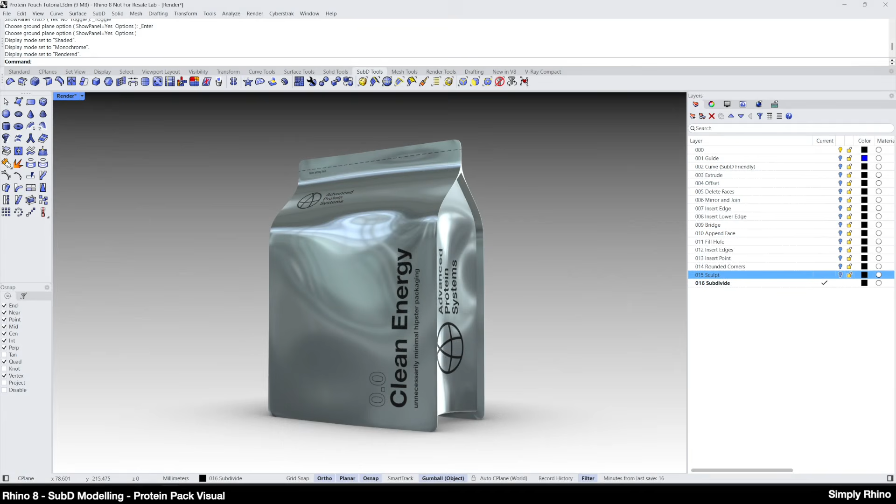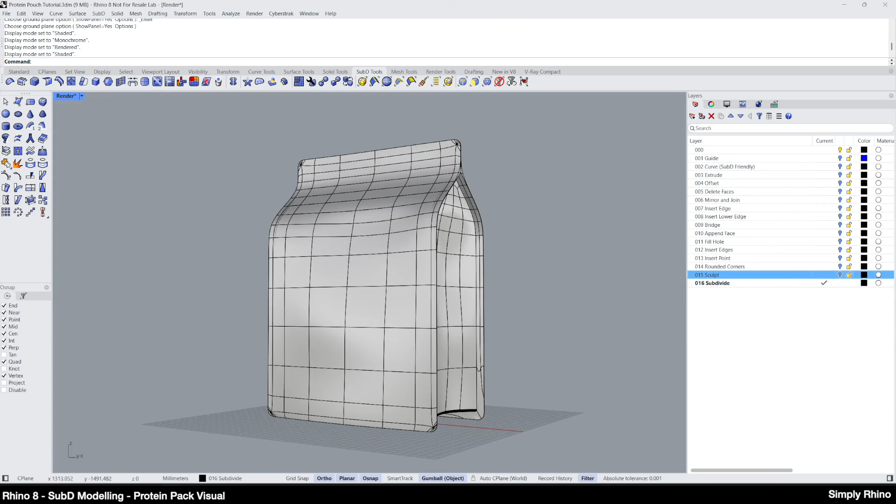I'll be using a SubD workflow which, whilst being fairly simple, requires an understanding of maintaining a simple four-sided topology. This allows for the creation of a dimensionally correct rigid version of the pack that can then be easily deformed for visualization, meaning that both production data and visuals are derived from the same model.

The starting point for the model is going to be this guide that I've created with polylines. The rectangle describes the overall width and height of the pouch, and this polyline describes the side profile structure. There are, of course, many ways to construct this model, but I'm going to start by creating the side profile

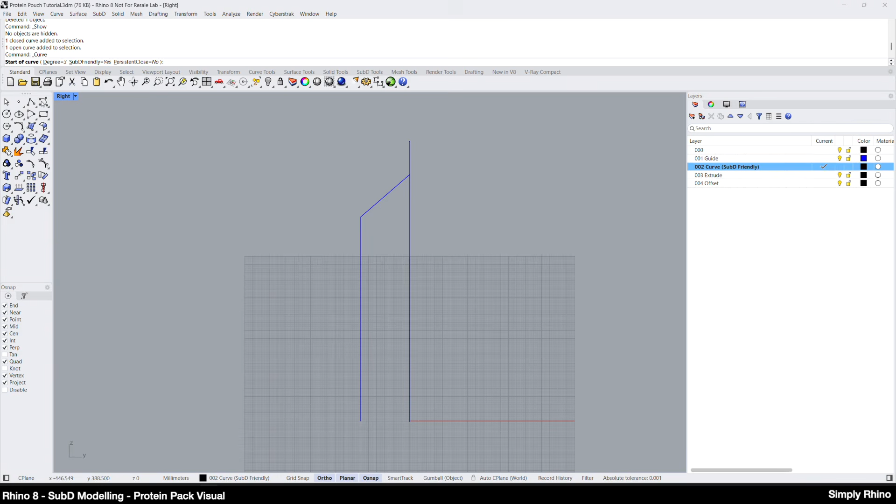shape. I've created a few layers already, so I'll make the curve layer active and create a new control point curve, making sure the SubD friendly option is set. In simple terms, using a SubD friendly curve will ensure that the precise shape of the curve will be maintained when building a SubD surface from it.

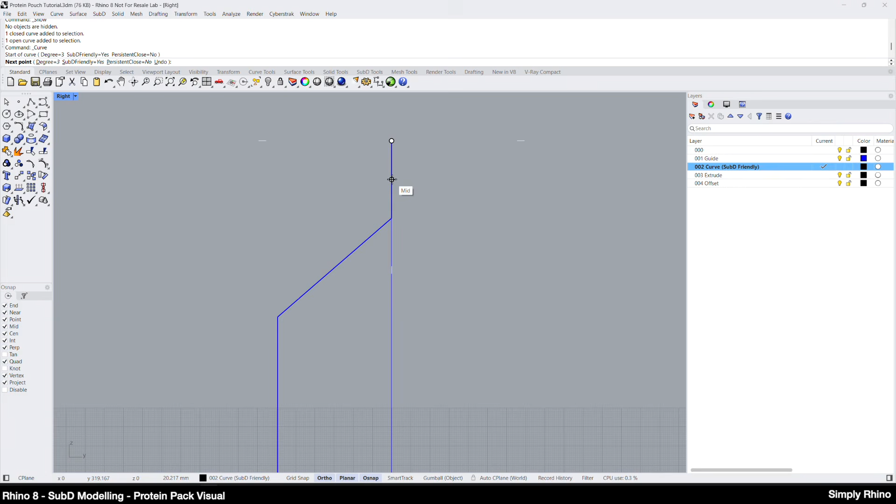I'll start the curve by snapping to the start of the polyline and then to the midpoint of this first section and then to the end. I'm going to go to the midpoint again here and then to the end, and the next point is going to be roughly equidistant from the midpoint above, and then one more point here, and finally a point at the

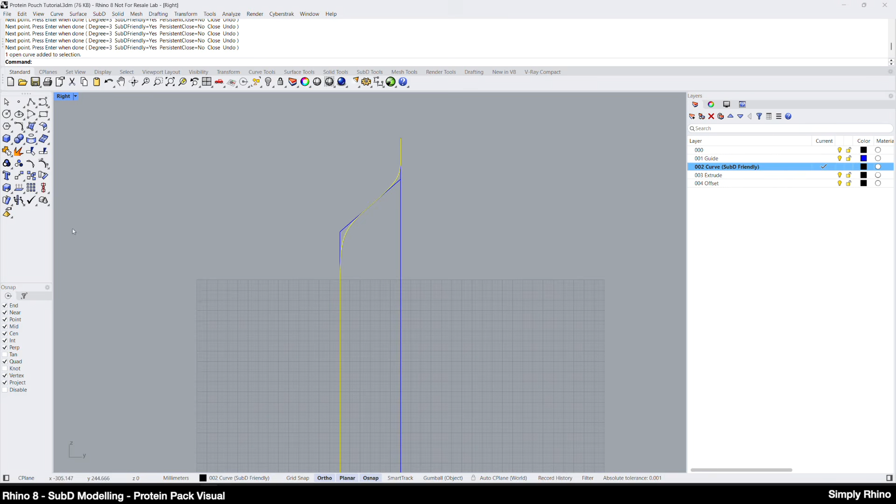end of the polyline. To tighten up this corner, I can turn on the control points and move these points closer together, and in order to equalize the topology, I might want to push this point a small amount vertically.

Open SubD friendly curves have grayed out control points at the second and penultimate positions. These points maintain a geometric limitation of zero curvature, or infinite radius if you prefer, at each end of the curve. In this case, however, the implications of this are not especially important.

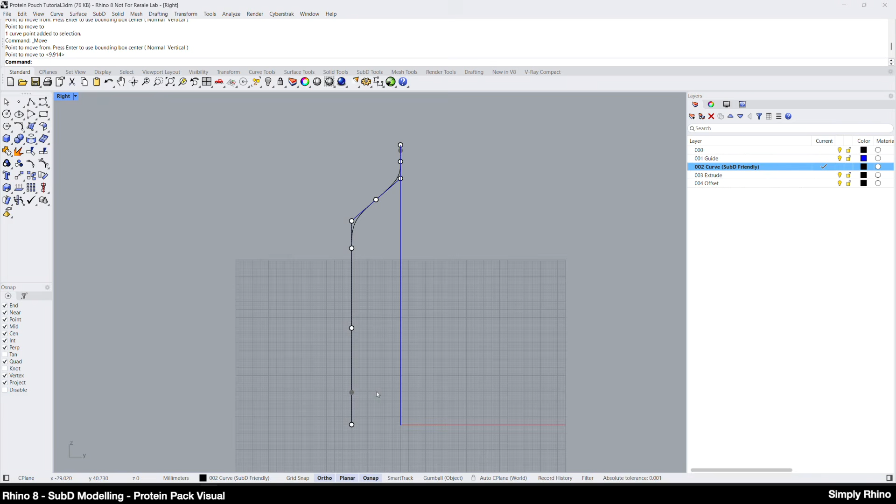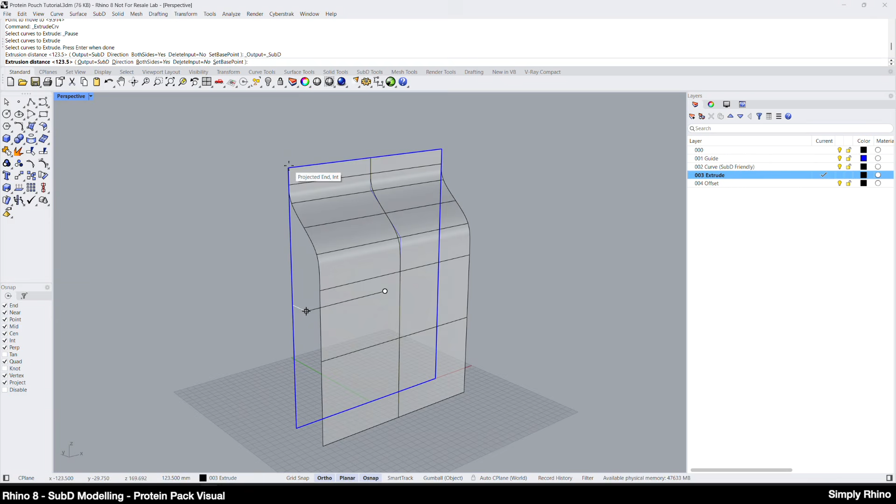Working in a maximized perspective viewport, I'll go to the SubD menu and run Extrude Curve Straight. I'll pick the curve and enable the Both Sides option. Then I can pull out the extrusion surface and snap to the blue rectangle in the guide layer. I'll then copy this surface onto the offset layer.

From the SubD toolbar, I'll run Offset and offset outwards by a distance of 0.5 mm, which represents the thickness of the heat-sealed edges of the pouch. The offset direction indicators are pointing inwards at this moment, so I'll choose the flip option to change the offset

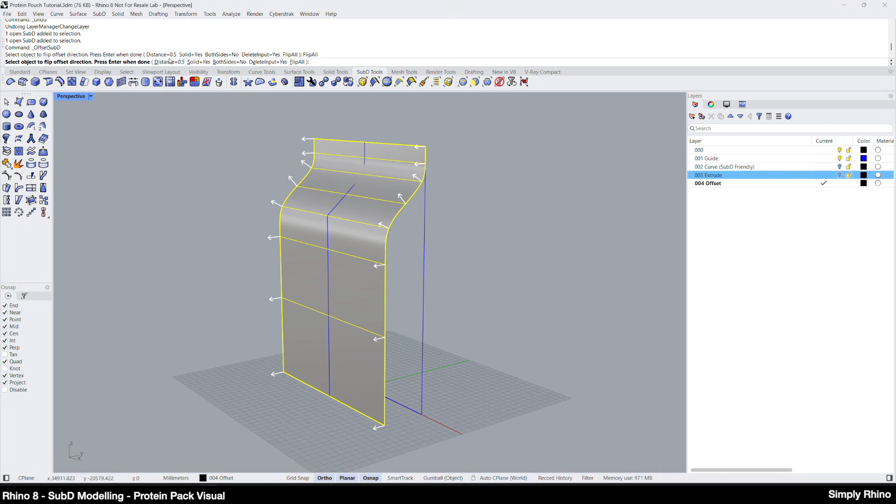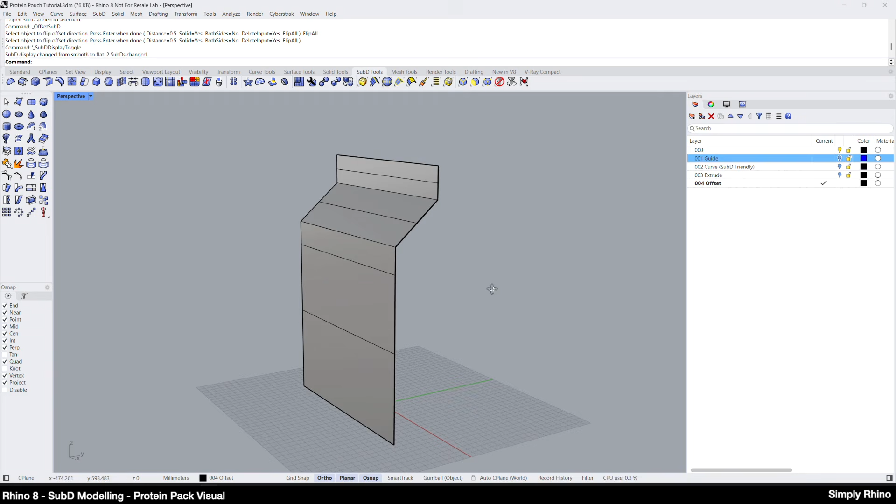direction. When working with SubD surfaces or solids, these can be visualized in either the smooth mode or the box mode. The smooth mode is the limit surface or the smooth SubD surface, and by hitting the Tab key I can enable the box mode or control net that shows the polygon structure of the underlying SubD mesh topology. Using the box mode will make the editing of the next step much easier.

I'll run Duplicate Layer and Objects and rename the resulting layer Delete Faces. I like to create a new layer for each of the major stages in a model, as this allows me to retrace my steps if I change the approach or design later on.

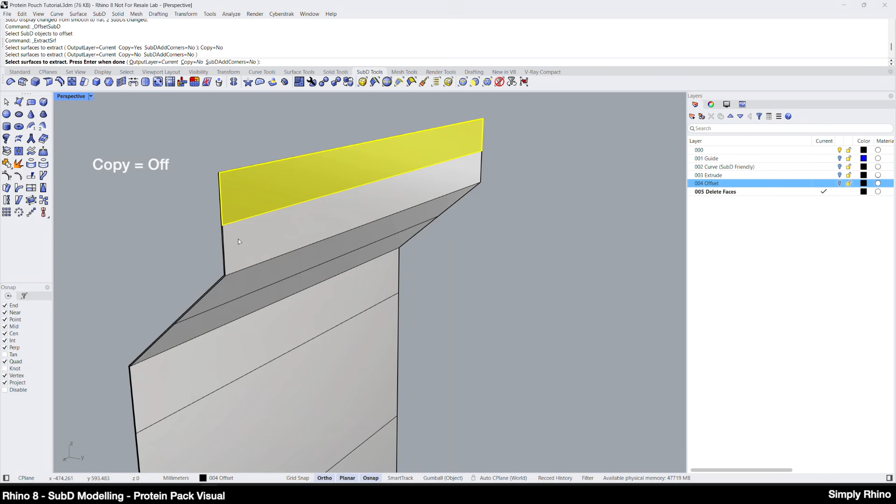I'm now going to delete some SubD faces, and I'll use Extract Surface with the copy option off to extract these two faces and then enter and delete. I've now created an opening in what was a closed SubD, and because the offset has creased edges, this opening will be rectilinear in both boxy and smooth modes.

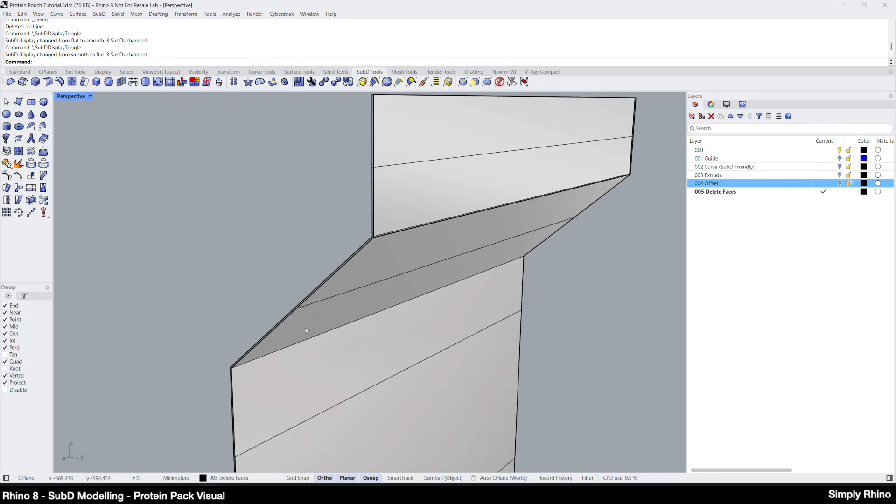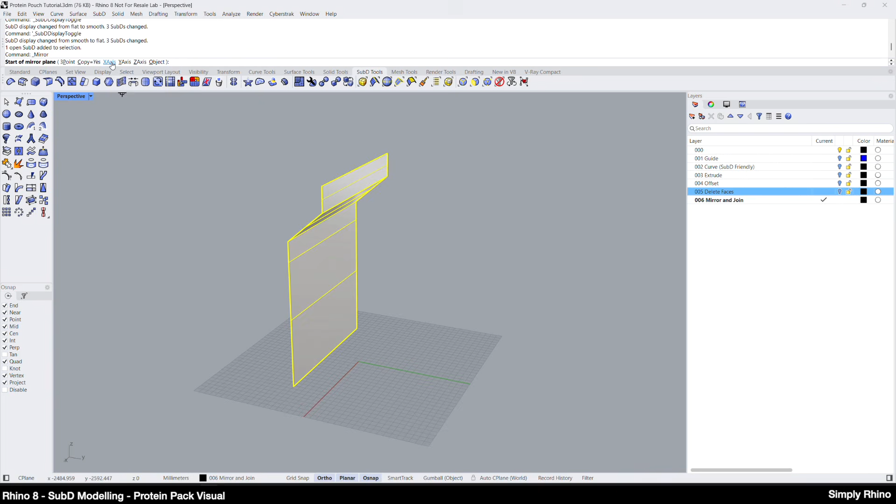I'll run Duplicate Layer and Objects again, and this time rename the layer Mirror and Join, and of course that's going to be the next step. I've set my geometry about a line of symmetry so I can pick this half of the pack, and in the mirror command I can use the x-axis prompt for this with the copy option on.

Next, I can select the two SubDs that will now have coincident open edges and join them together. Switching to the smooth display mode shows the expected result. I've now copied the geometry onto another layer which I've named Insert Edge, and switch back to the box SubD display mode. Before modifying the geometry, I'll add symmetry via the reflection command.

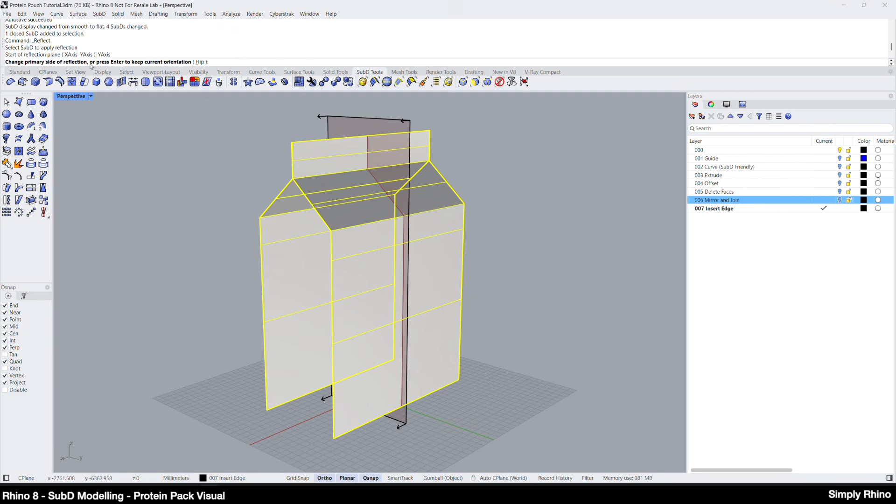This allows one half of the model to update automatically, mirroring any changes on the live half. So I'll run reflection from the SubD toolbar, pick the SubD object, and then choose the Y-axis option. In the preview, I'll see the symmetry plane and be able to flip which side is the live side. Once completed, the reflected side previews as dark grey.

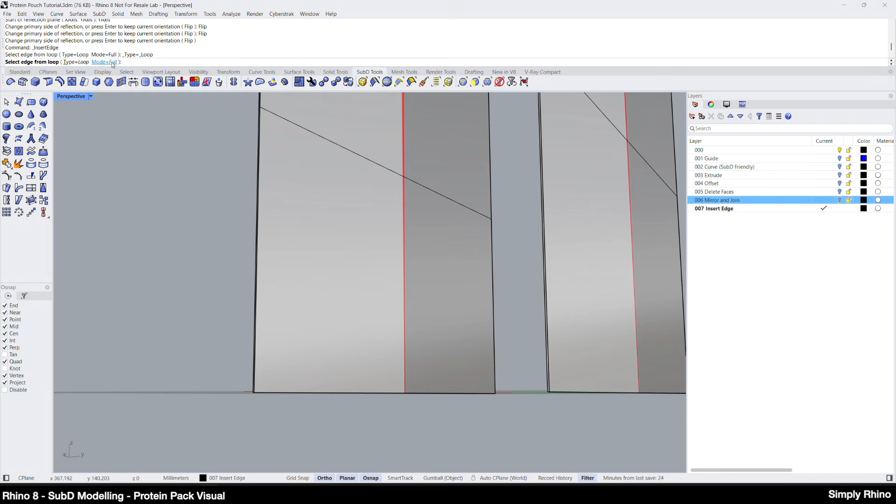Next, I'll insert an edge that will define the extent of the heat-sealed edge of the pouch. So I'll run Insert Edge from the SubD toolbar using the Loop option and start to pick this edge. And this is what will effectively be copied and then moved to create the new edge.

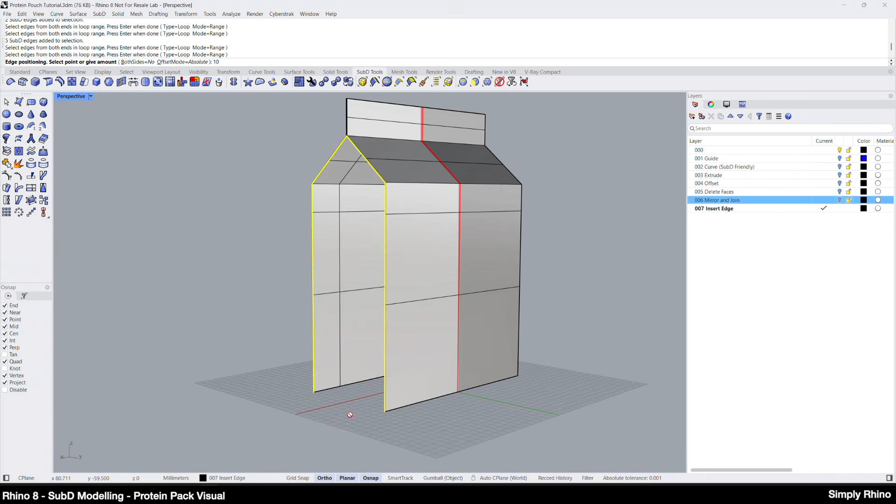Double-clicking here will pick continuous edges, and once I've selected the necessary edges, I'll choose the absolute offset mode and input a value of 10. The new edge will now be inserted, and the reflection command will mirror this change on the other half of the geometry.

Next, I'm going to add a similar condition on the bottom edge, and at this stage it's important to concentrate on the topology and maintaining a simple four-sided structure using the simple premise that if the topology is right, then the shape will pretty much look after itself. Now, of course, that is an oversimplified statement, but nevertheless it's the topology that is driving the shape.

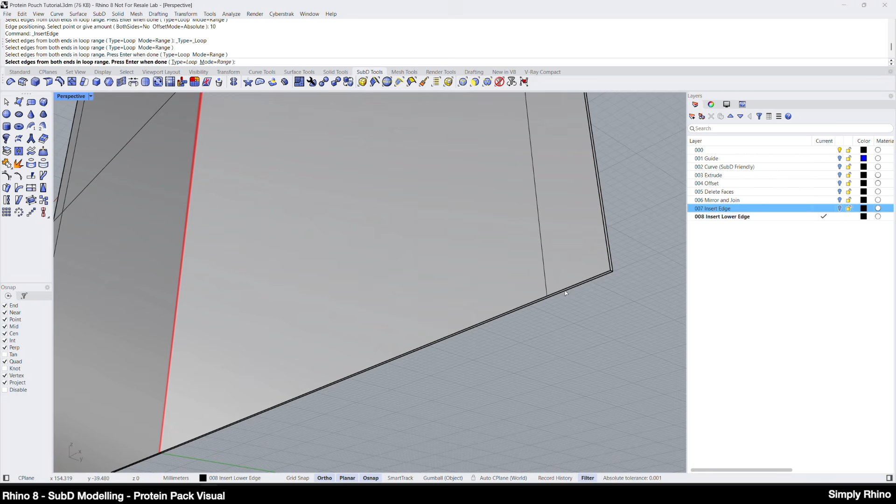I'll use Insert Edge again using the same parameters as previous and pick these bottom edges, which will result in new edges here and a four-sided face in the corner. When I switch to the smooth SubD display mode, these new edges will move inwards, but I can control the position of these absolutely in the next few steps.

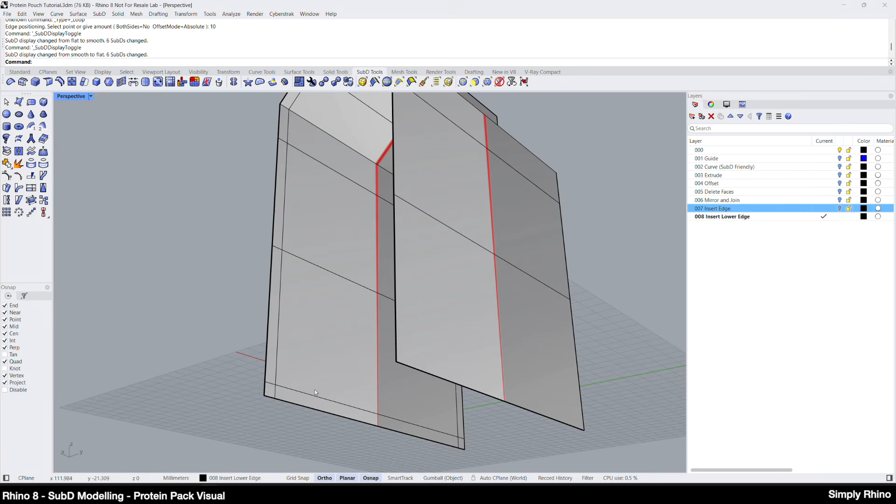Next, I'm going to extract the faces inside of the 10mm boundary I created with the inserted edges. So I'll use the same extract surface command I used previously to remove the 10 interior faces. For the next step, I want to close off the sides and base of the pouch inside the 10mm boundary, and I'll do this on a new layer called Bridge. There's a number of methods to close off these openings, but I'll look first at the Bridge command.

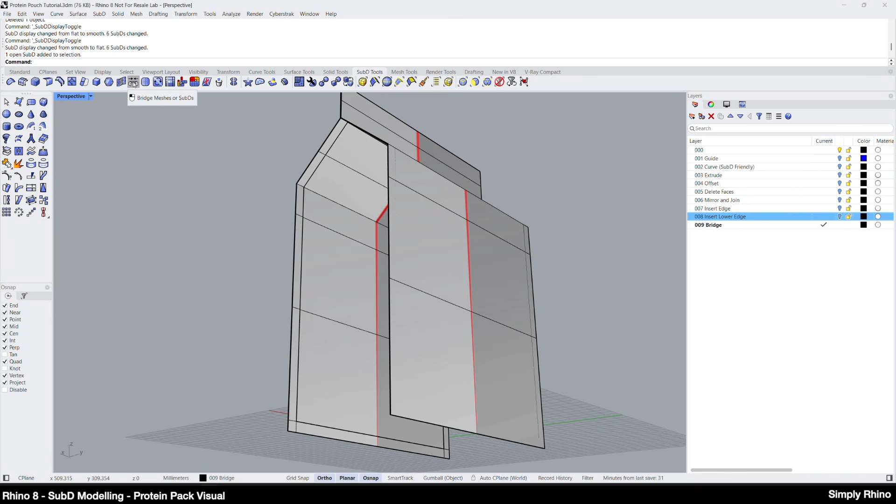The Bridge command is here, and I'll make sure I have the Edges rather than Edge Loop option enabled, and I can then pick the 3 edges on this side and enter before picking the corresponding edges on the opposite side and pressing enter again. I'll then see a preview of the newly created faces, and for now I just want one segment, which will create 3 four-sided faces from the 3 pairs of picked edges, and I'll check the Join and Crease options.

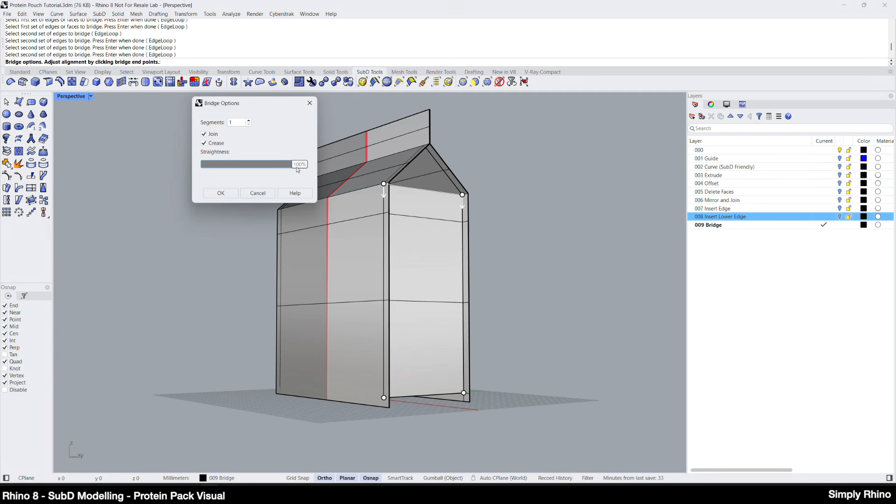Next, I'll look at closing off the top of the sides, and, working on a new layer, I'll run the Append Face command from the SubD toolbar. This command allows for the creation of faces with a predetermined number of sides that will attach themselves to the chosen SubD object. It's also a useful command when making topology changes involving adding and removing faces.

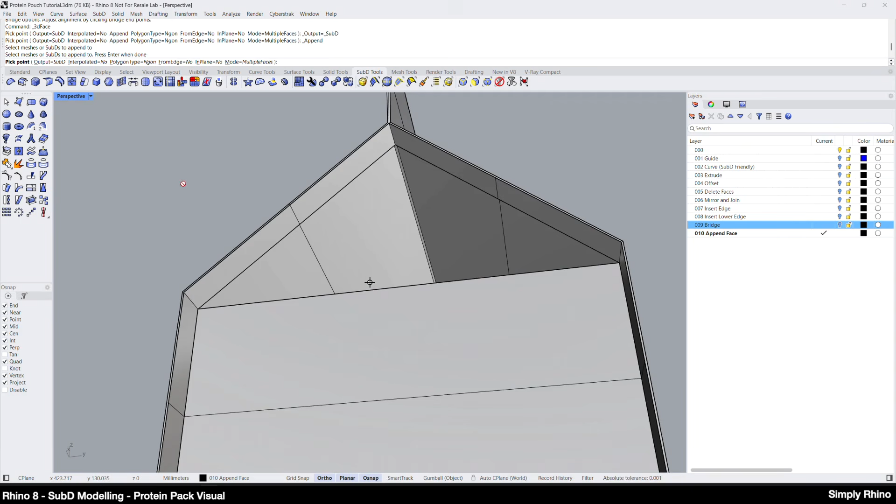I'll run Append Face and pick the SubD pack. Then from the command line options I'll choose Quad and Multiple Faces. I'll make sure that I have the Vertex Object Snap on and maybe turn off the Point Snap. I'll now snap to the 4 vertices, and this will create a new face appended to the SubD pouch.

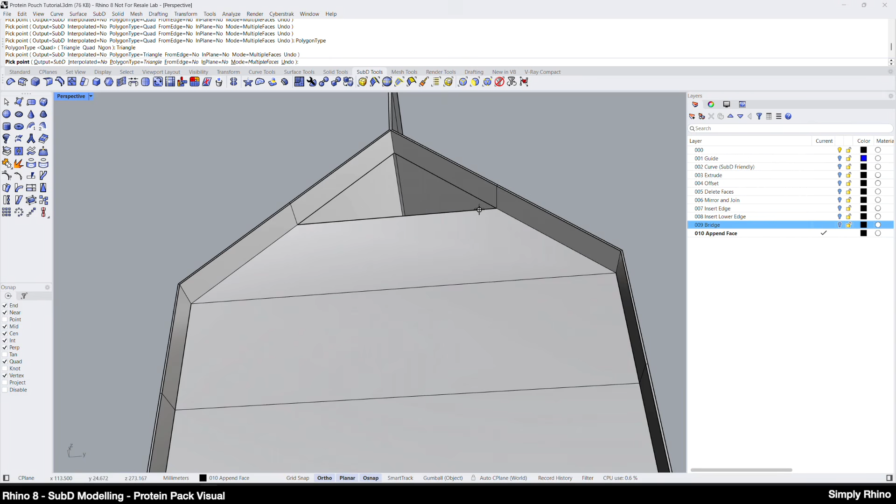Next, with the command still running, I'll change the polygon type option to triangle and append the upper face, again by snapping to vertices. I'm going to add a crease here to these edges, and this needs to be a hard crease. So I'll right click on the crease icon here, pick these 4 edges, and that has added the hard crease.

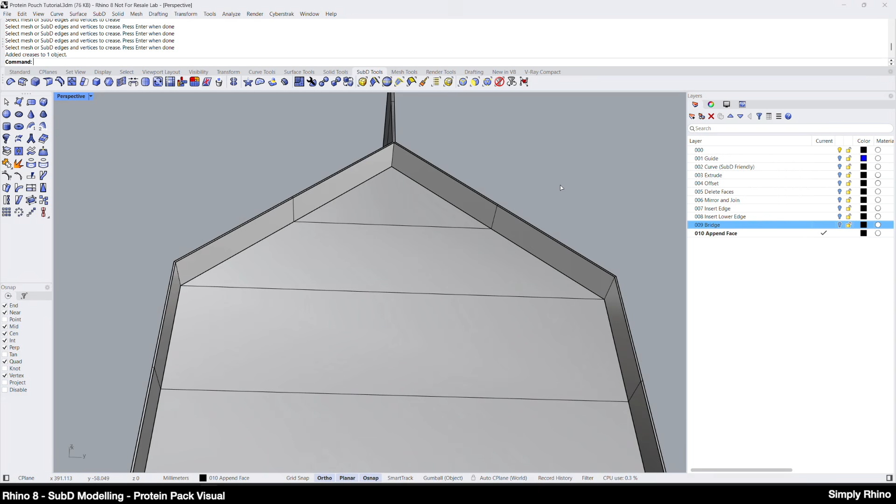And this is recognizable in the box mode by the thicker edge display. Everything is now closed up apart from the bottom. And before closing this up, I'll remove the symmetry from the SubD by right-clicking on the reflection icon and then picking the pouch. To close the underside, I can either use the Fill Hole command or Append Face.

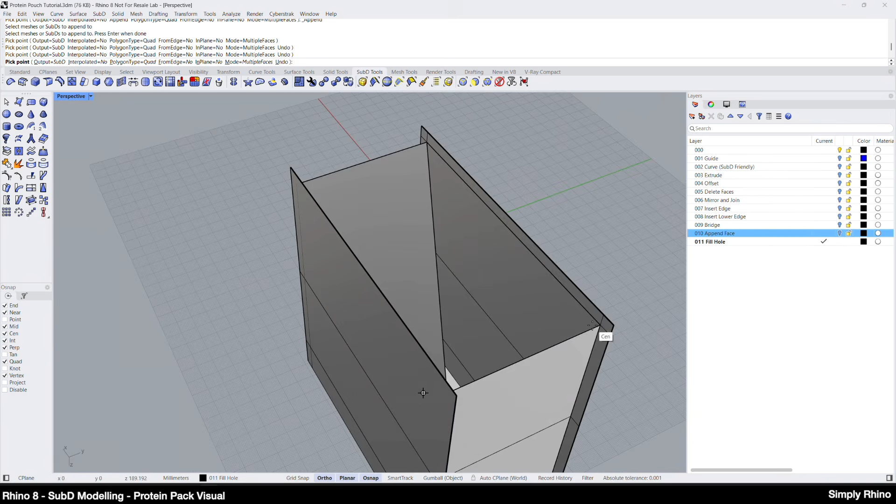So I'll go with Append Face, make sure the polygon option is set to quad, and snap to the 4 edges here. Once finished, I'll add a hard crease to the 4 edges as previous. Looking at this with the SubD display set to smooth, I can see the sharp defined structure is maintained with only the shoulder area here having some curvature.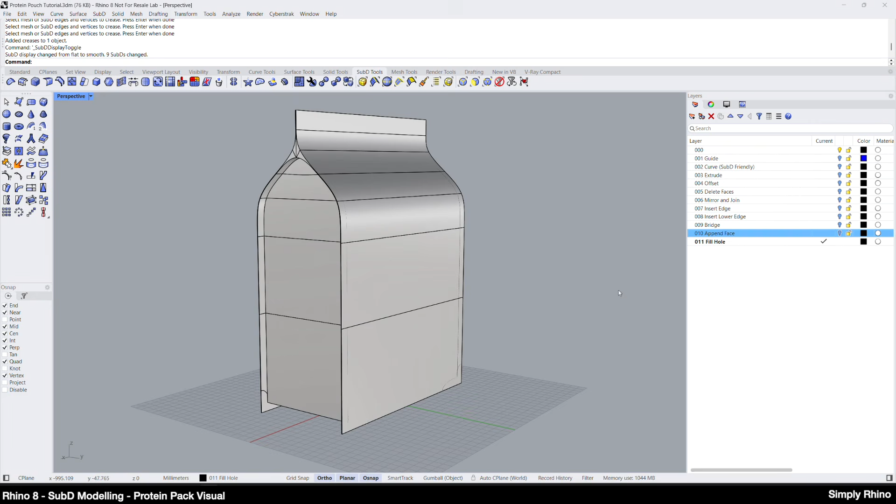The main elements of the pack are done now, and I just need to add a little more detail and definition. Next, I'm going to add some edges to control the outer face of the heat-sealed perimeter, and the first step here is to add a reflection, and I'll set this about the y-axis.

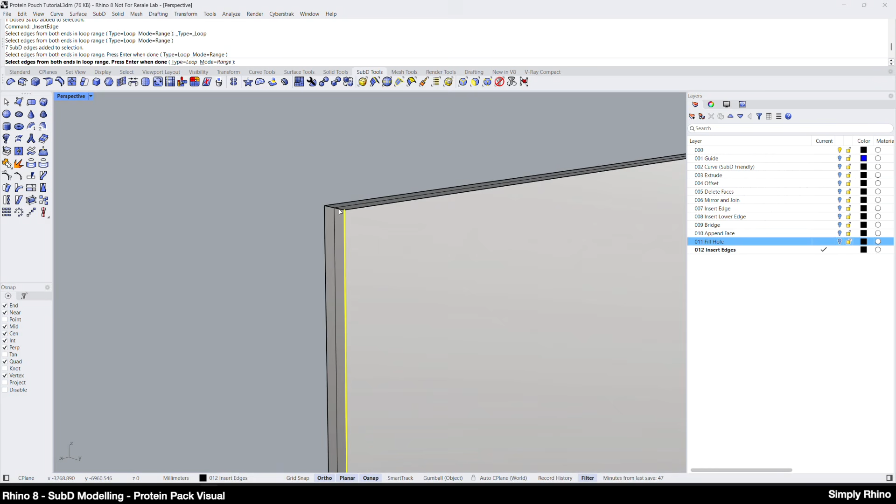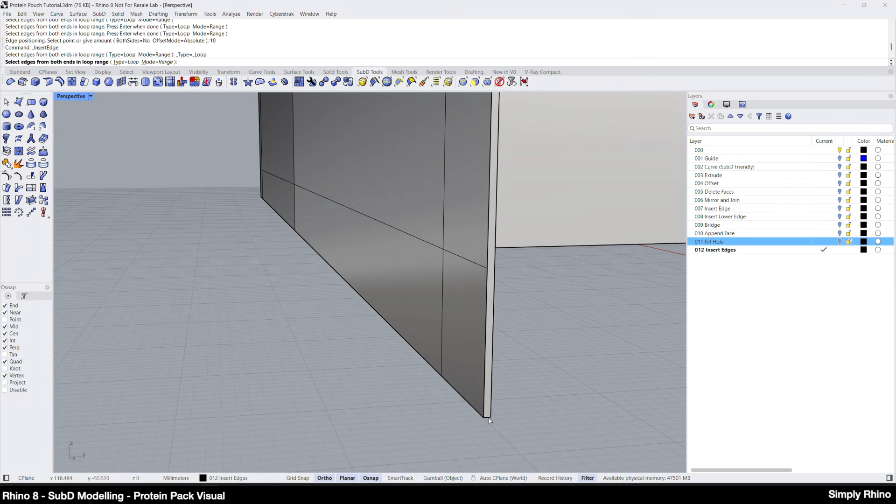I can then run Insert Edge, and I'll select all the outside edges, including the 2 small ones across the top. I'll hit Enter, pull the cursor towards the center of the pack, and set a distance of 10 using the absolute option as previous. I'll repeat this process on the bottom of the outside edges, making sure not to forget these small edges here and the corresponding ones on the underside.

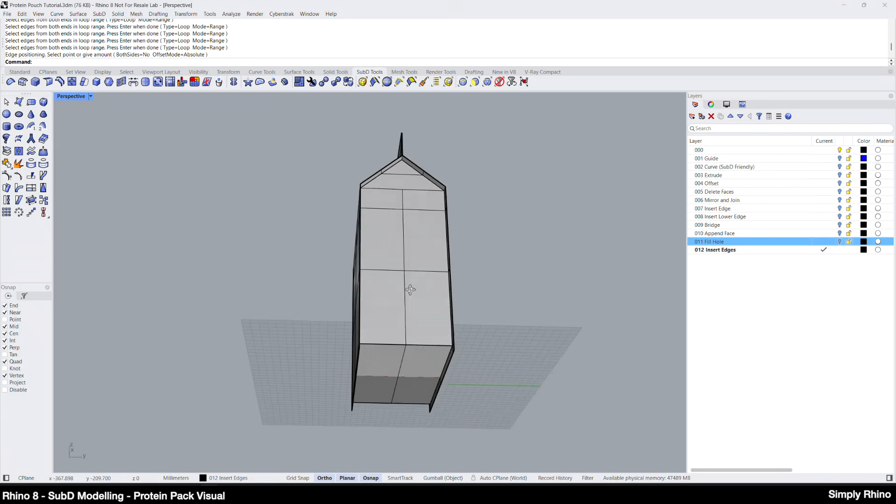So that I can push the center of the sides inwards later on, I'll insert another edge in the middle and pick these 4 edges here, and then come along and snap to the midpoint. Looking at the resulting topology at the top of the sides, I'll now have a 5-sided face here, and as I want to add a crease on the underside of the heat-sealed edge here, it would really help to simplify the topology by dividing both of these surfaces along the middle.

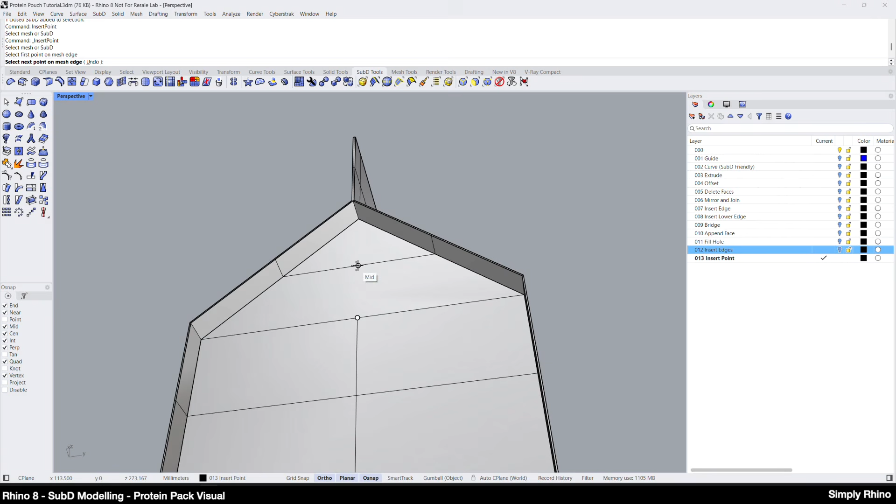Insert Edge isn't going to work in this instance, but instead I can use the Insert Point command. So I'll create another layer and then run Insert Point from here. I'll then pick the SubD and snap first from vertex to mid, and then up to the vertex here. This will divide these 2 faces vertically, and I can now safely put a hard crease on this inside top edge here. Switching to the smooth SubD display mode, I can see that this top area is now looking correct.

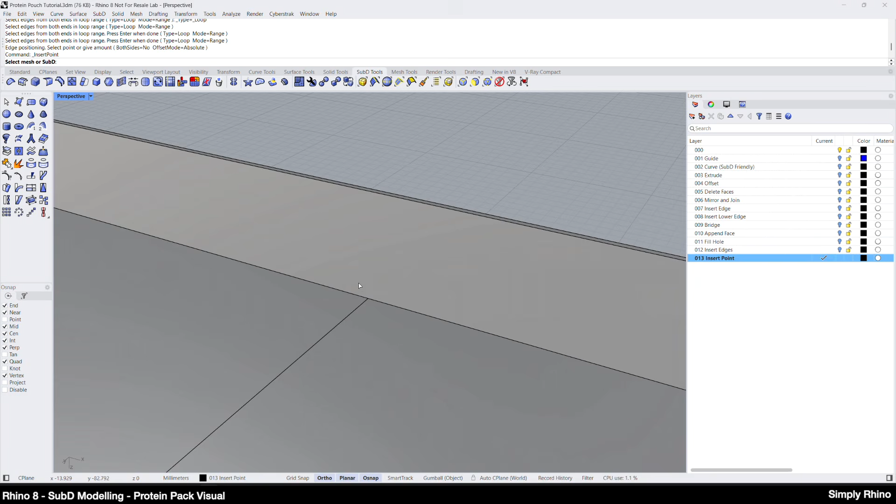I need to add an additional edge across the underside, as I neglected to do this earlier. So I'm going to remove the reflection, and then I can use Insert Edge to copy the 2 edges here to the midpoint of this perpendicular edge. Then I can use Insert Point for these smaller edges here, making sure I'm using the vertex and mid snaps. One of the nice things about SubD is that there's always an opportunity to add and remove faces and edges to change or improve things as the design progresses.

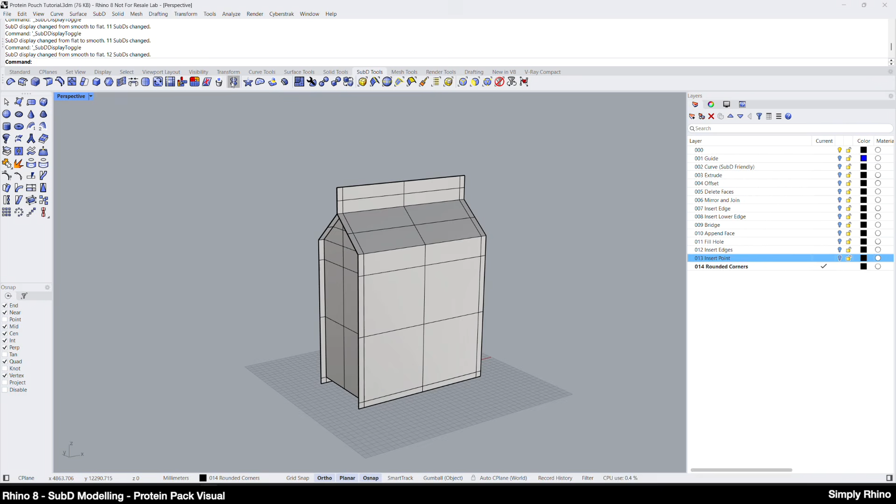Next, I'll add the rounded corners to the heat-sealed boundary, and I'll first reinstate the y-axis reflection. I'll use the bevel command, which is a sort of fillet edge equivalent for SubD, in that the starting point is a sharp edge. Unlike fillet edge, however, it isn't possible to specify a constant radius, as the resulting smooth SubD is going to behave like a degree 3 NURBS surface.

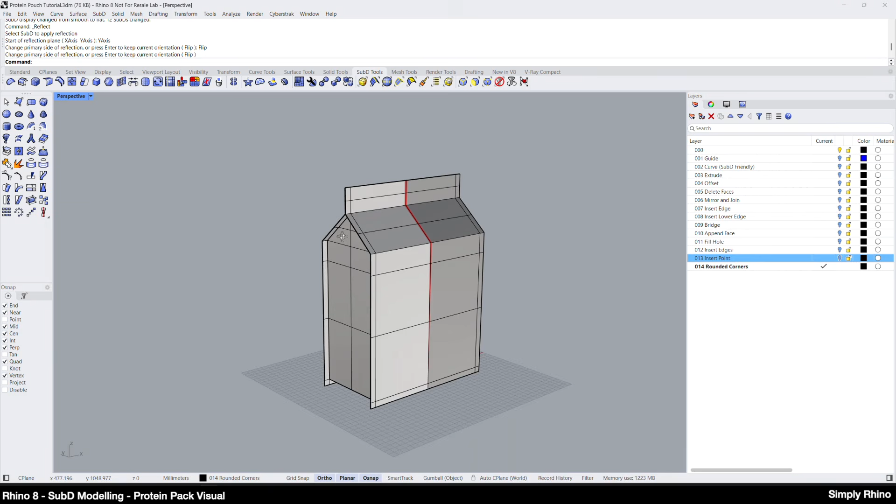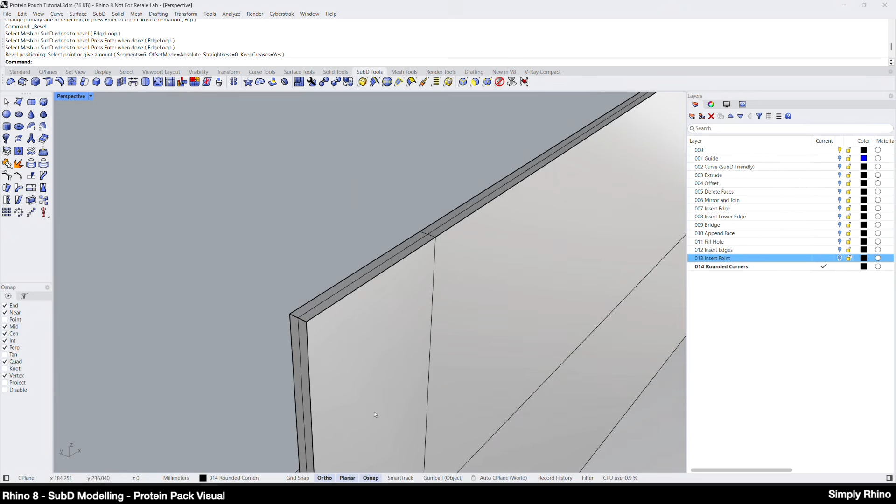I'll look at the bottom first and pick these 2 edges. I'll run the bevel command and set the segments option to 6, and then pull outwards, and the extent of the bevel will be constrained by the next edge along. I can then repeat the process on the top corner, taking care to pick the 2 edges that are involved here. Once again, the next edge along will constrain the size of the bevel.

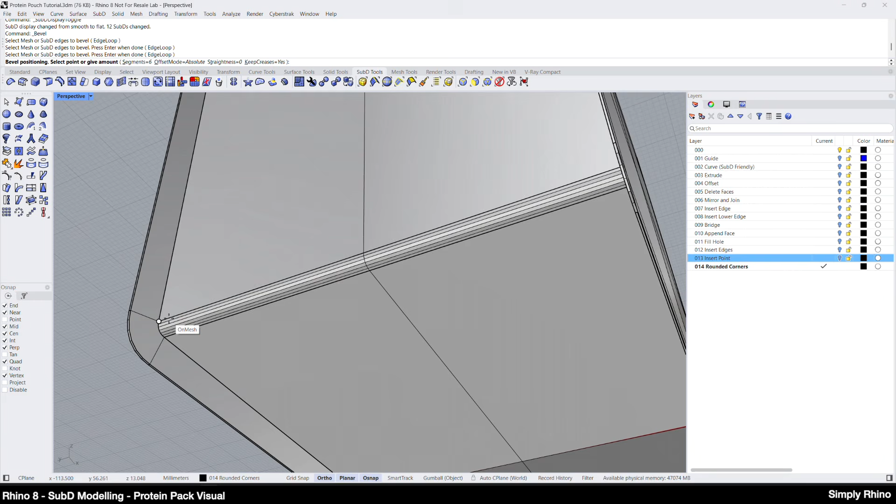Finally, I'll look at adding a small bevel on this edge here, and I'll aim for something that looks like approximately 3 to 4 millimeters. There's no edge to constrain the bevel here, and depending on the active snaps and mouse movement, it can be quite hard to constrain the bevel accordingly. I'll now look at the result with the smooth SubD display mode, and the geometry looks complete now.

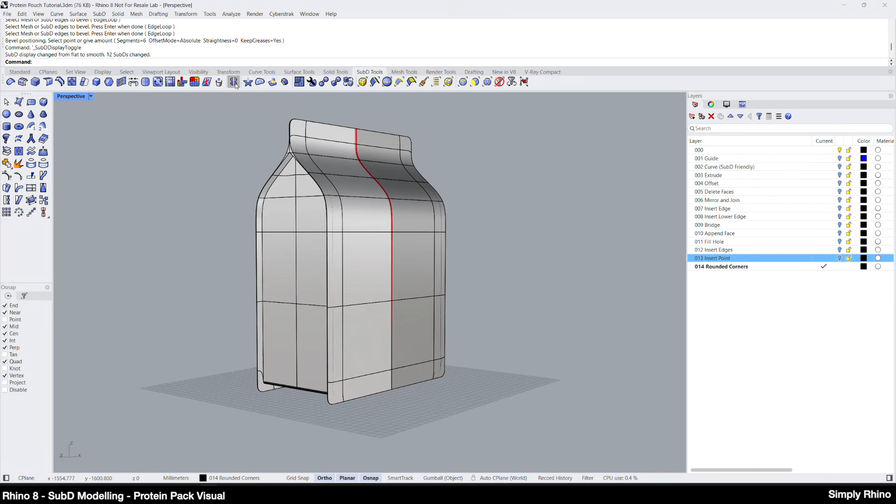So if I need to create artwork or dimension drawings to aid manufacture, then this is a good reference. For visualization, however, I now need to add some irregularity to the pack to make it appear more realistic. Working on a new layer, I'm going to start to add the irregularity, and I'm going to do this in two distinct stages, starting first by moving edges and faces on a copy of the existing model.

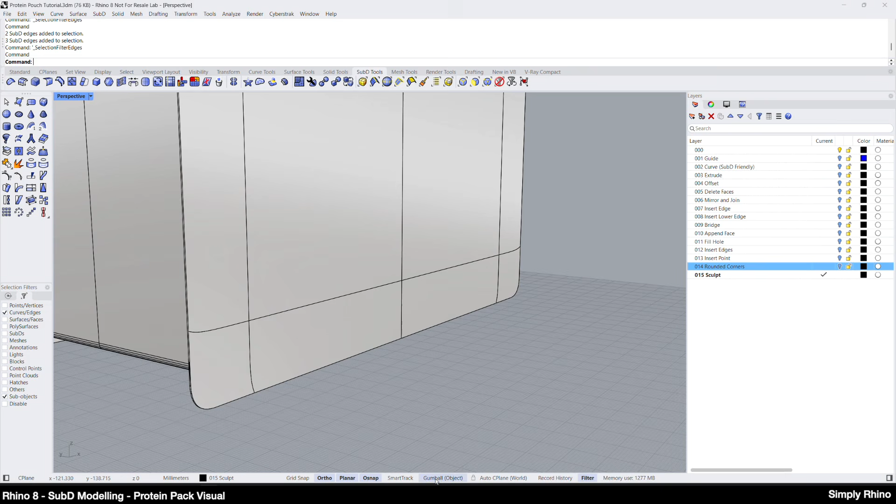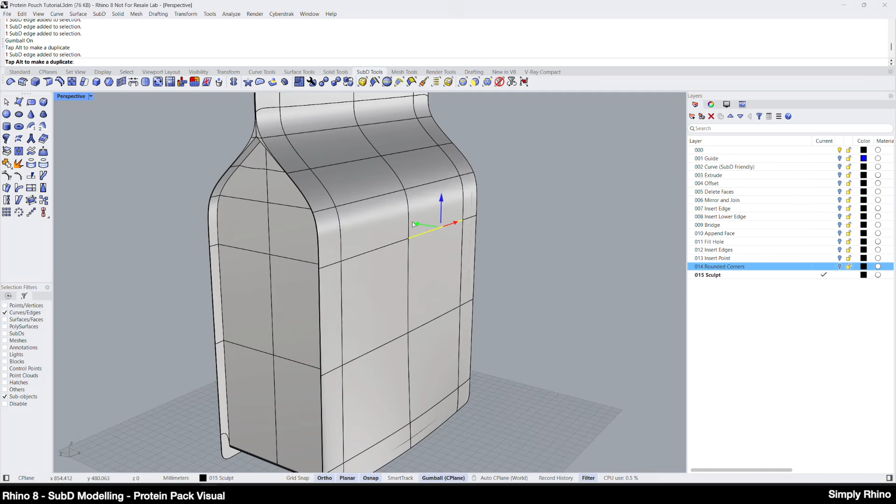Working in the SubD box display, I'll limit the selection to edges, turn on the gumball, and move a few edges at a time, making sure to check the result after each movement by toggling to the smooth SubD display mode. I'll need to be especially careful when moving edges and faces inwards, particularly when working close to the sides of the pack, to make sure that I don't push the outside of the pack through the inside edges.

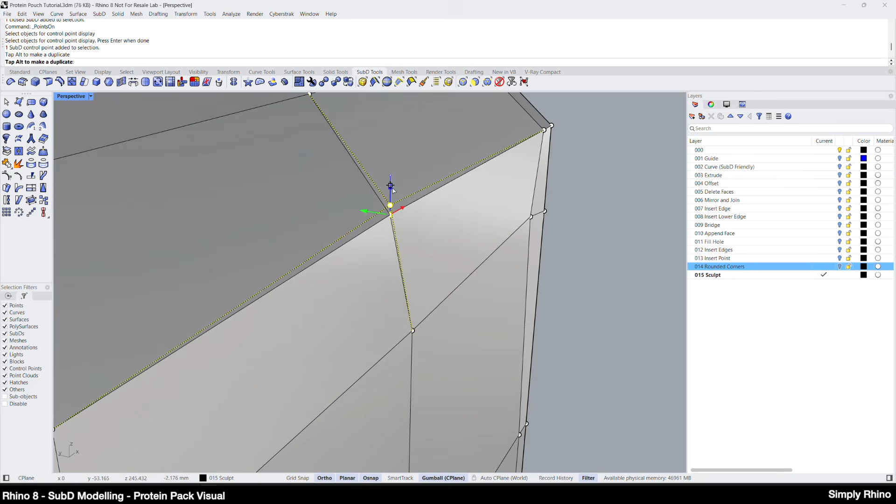And I'll also work without symmetry as I'm looking for an asymmetrical result. I can also work with vertices, as these are sometimes easier to control, and depending on which elements I'm moving, I'll need to constrain the gumball movement accordingly. Gradually, by push-pulling faces, edges and points, I'll arrive at a result that is starting to look more realistic.

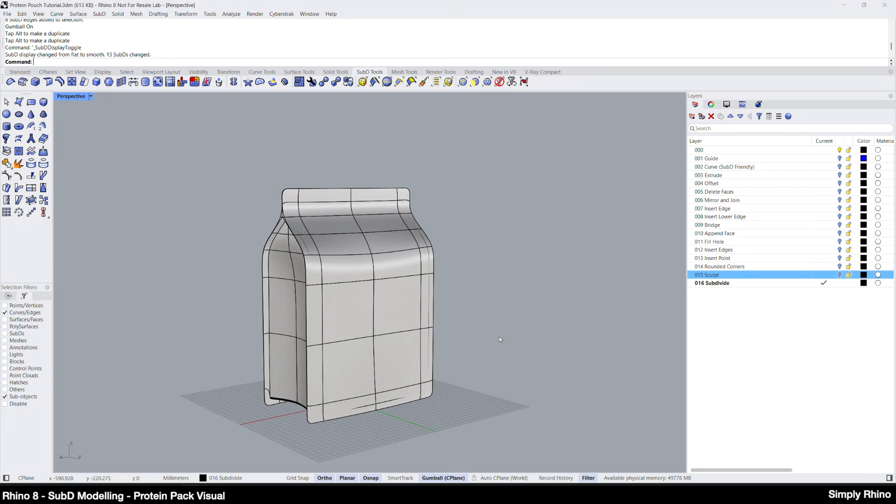To enhance this result further, I'm going to look at subdividing the complete SubD form. So I'll duplicate the layer and objects and rename the new layer Subdivide. When I run the Subdivide command from here, each four-sided face will be subdivided into four by adding one edge in each of the two face directions.

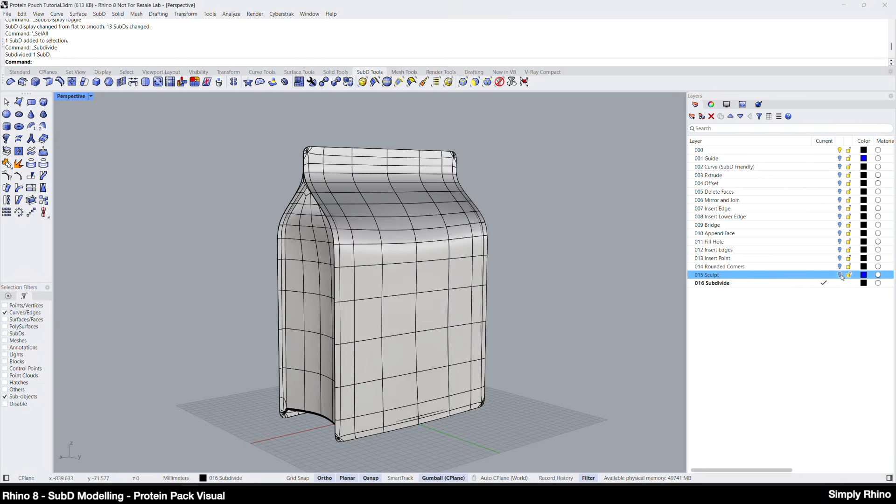Subdividing the complete model shouldn't change the overall shape in any meaningful way, and to check this, I can change the layer color of my Subdivide layer and turn on the previous layer for comparison. I'll do another round of nudging faces and edges on the subdivided form to add more undulation and some soft depressions into the shoulder area.

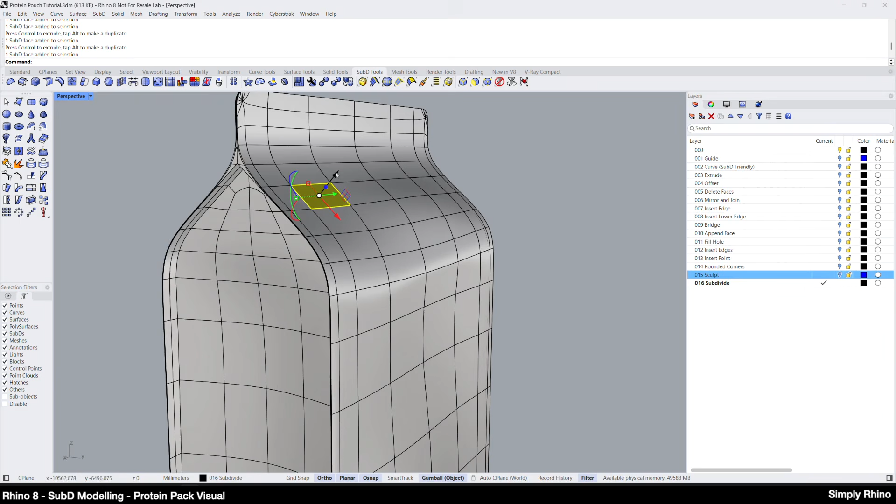Subdividing generally like this is fine for the four-sided faces, but it can adversely affect the topology of more complex areas, like, for example, the inside of these rounded corners. So I'll carefully remove edges on areas like these to simplify the face structure.

Next, I'll look at creating a quick visual, and one of the first and perhaps most challenging tasks here will be to create and apply a material. I have full-size artwork here for both versions of the pack, and this is a simple black and white artwork that has the usual crop and bleed marks. I've put in some extra registration marks that define the shoulder area, and the artwork is presented in a square format. This is important, as can be seen shortly.

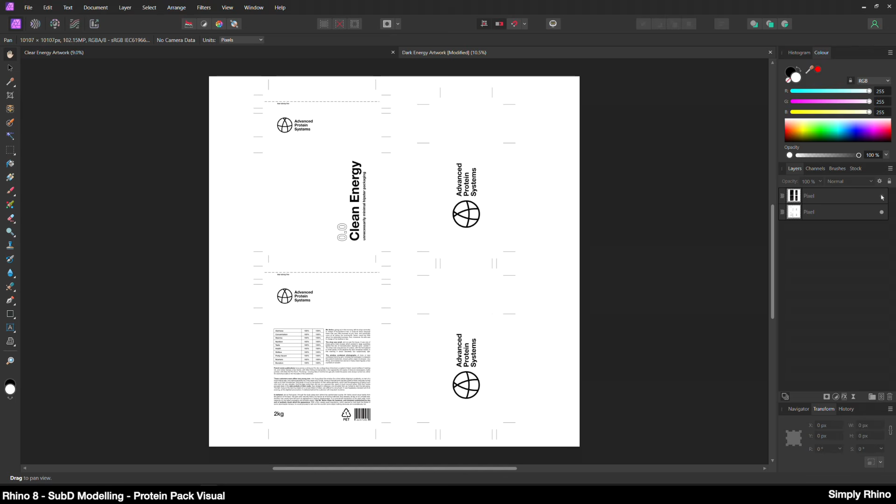I've got two versions of the artwork, and these have exactly the same registration, meaning that I can easily make the second material variant. I'll save this out as JPG or PNG images, being careful about the size of these images. They only need to have an approximate pixel density for the render size I'm going to produce.

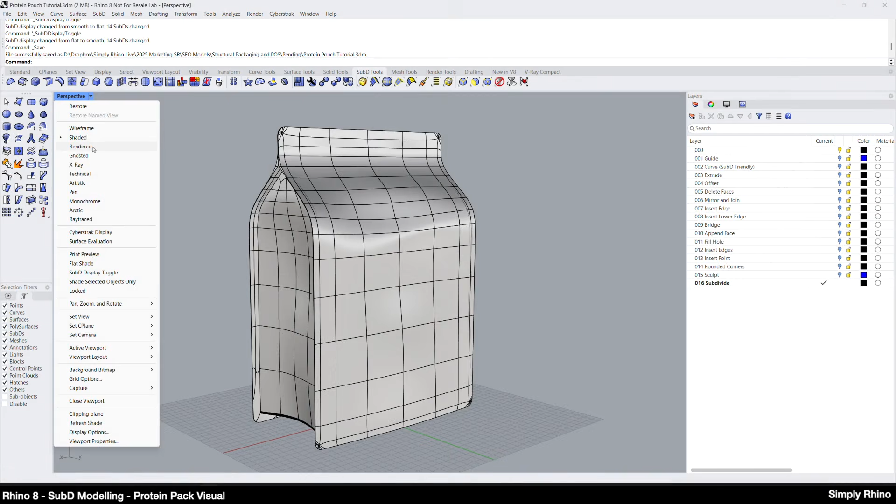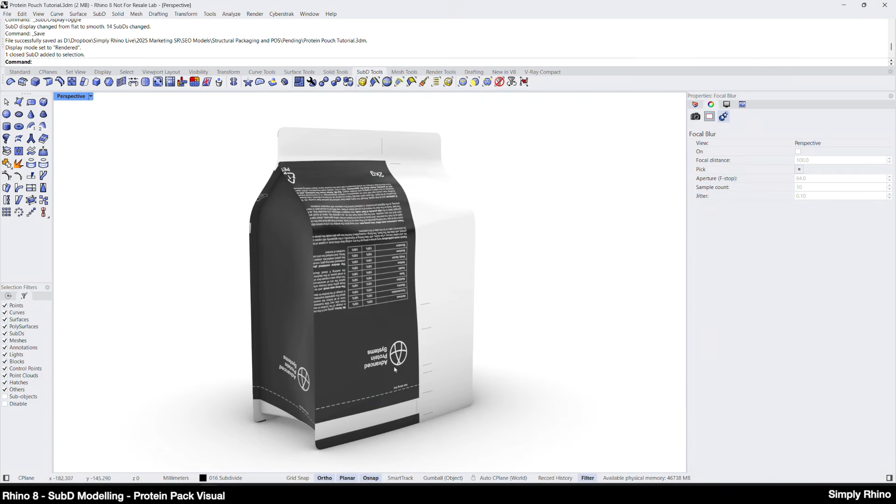Back in Rhino, I'll switch to the rendered display mode and create a new physically based material. In detailed settings and base color, I'll apply the artwork material I just created by clicking on the checkerboard icon and navigating to the bitmap image file. The material will update in the rendered viewport, but the mapping, i.e. the placement of the artwork on the model, will appear arbitrary at this stage. I'll look at the metallic and glossy values of the material later on, but for now I need to concentrate on the positioning of the material accurately on the model.

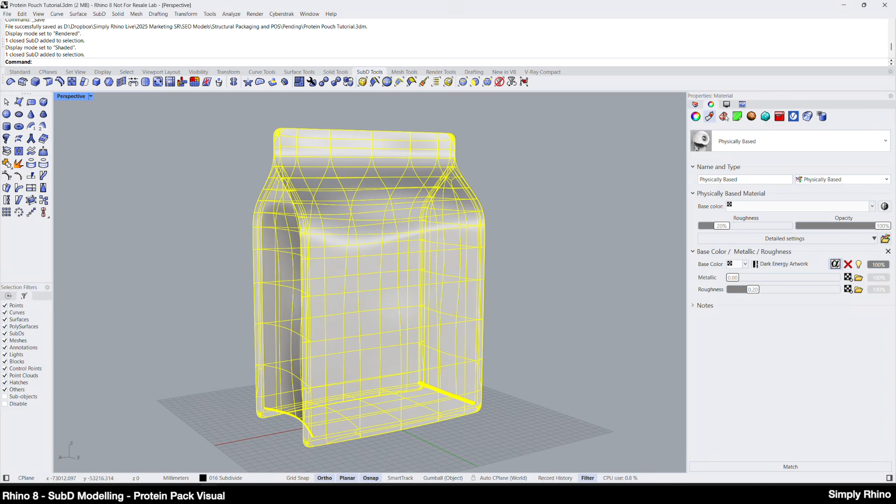I don't need to pull the model apart to do the next step, as I can use Unwrap to separate out the various faces of the pack into what McNeel calls islands, and then use the UV editor to place these islands on the artwork. I'll pick the SubD and run Unwrap, and accept the default mapping channel 1 and enter.

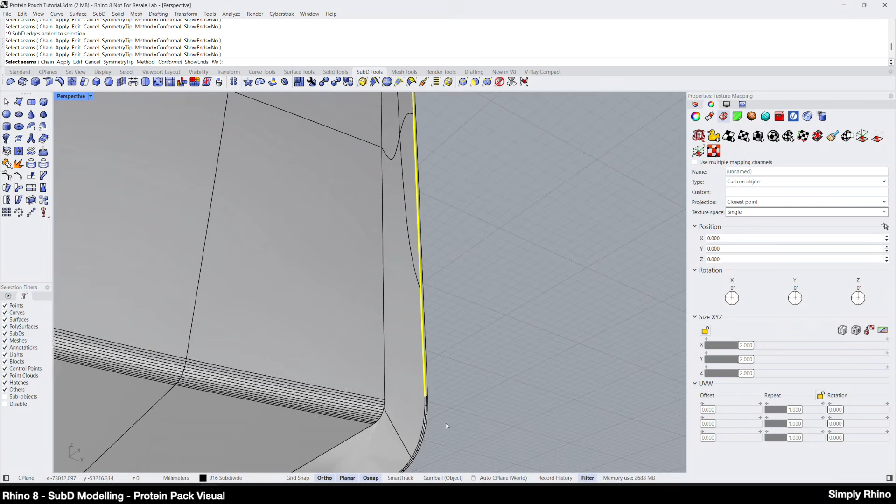At the Select Seams prompt, I'm going to start selecting the seams that will separate out the various faces or islands. So essentially, the front, back, left, right and bottom. This requires some careful picking and also, of course, a model that has an appropriate structure to do this.

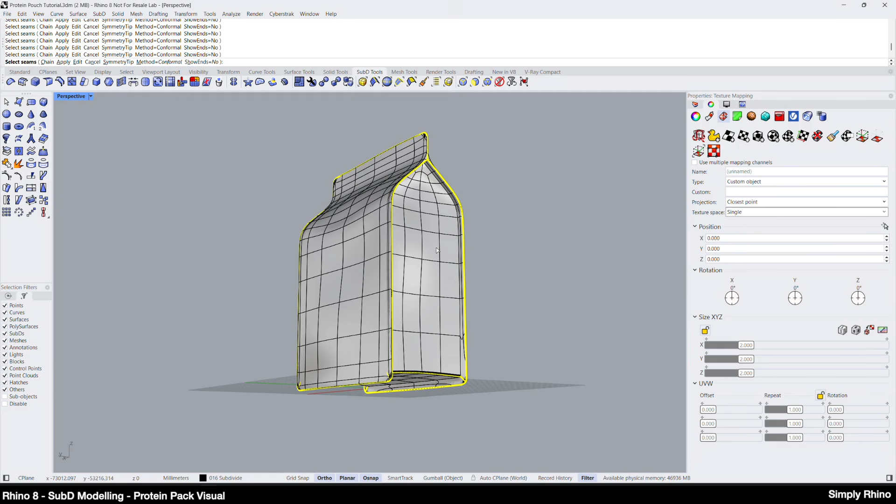I've included the inside edges of the heat-sealed seams in the left and right sides and bottom, and the thin outside edges of those seams in the front and back islands, meaning that I'll have 5 islands in total with some slightly irregular boundaries. So now I'll finish the selection by hitting enter.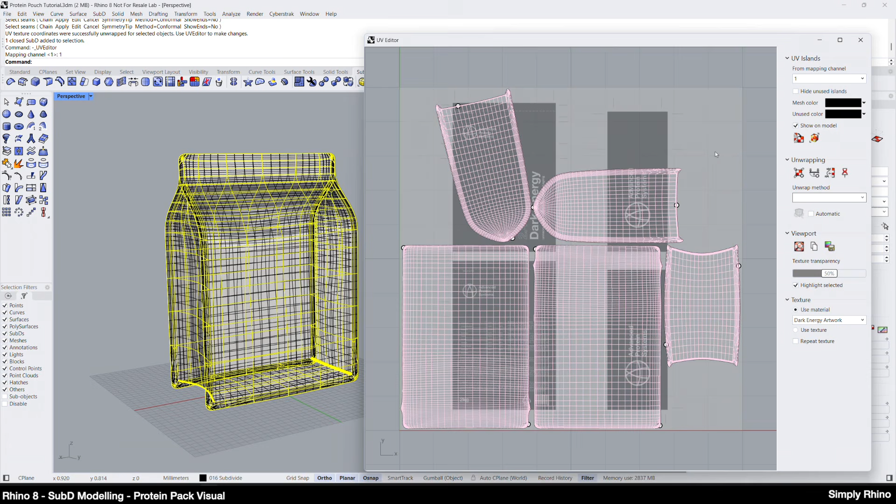Now I can open the UV editor and I'll see the flat artwork and the 5 flattened mesh islands. The metaphor here is that the artwork stays at a fixed size and the mesh islands can be scaled, rotated or adjusted to fit the static artwork. It's possible to see which mesh island relates to which part of the model by clicking on the part in the UV editor.

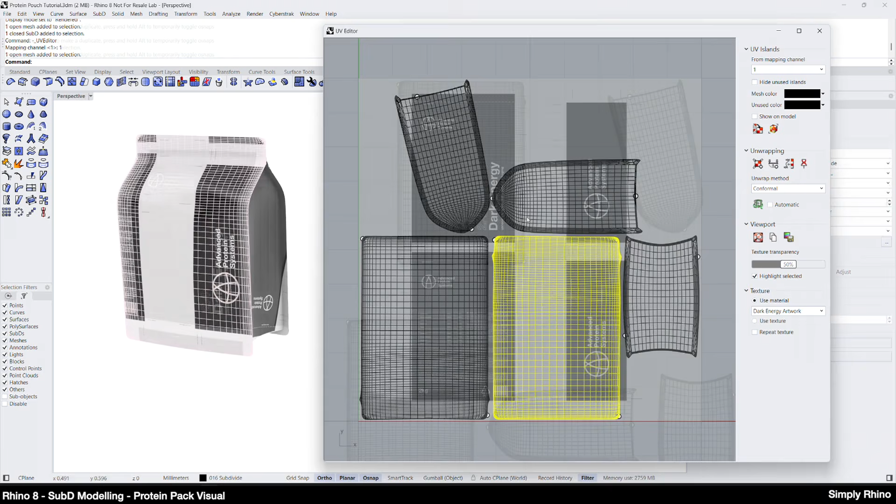I'll switch to the rendered viewport, find the island that represents the front face, and then move the other islands out of the way. Then I can position and scale the front island to the artwork, gradually scaling and moving until this looks correct. Then it's just a case of repeating the same process for the other islands.

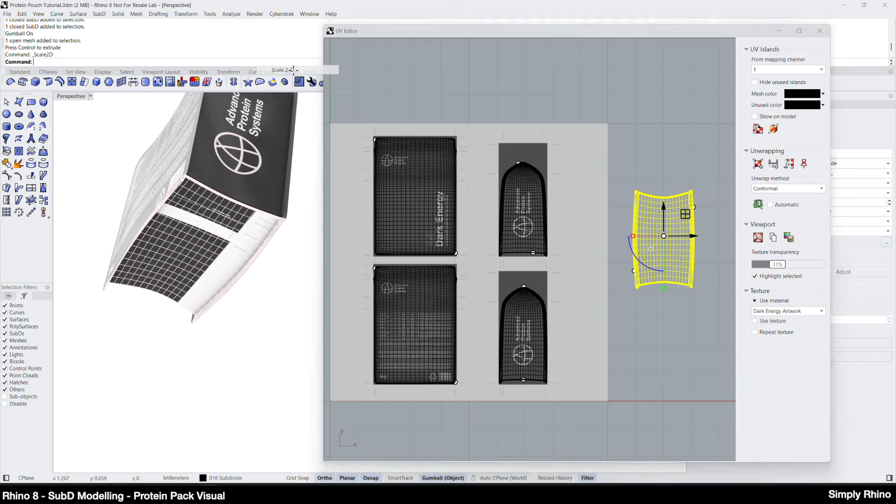There isn't a specific artwork for the bottom, but on the understanding that this is going to be black, I can just reduce the scale of this bottom island and drop it over a black area of the front artwork. This mapping will be saved in the UV editor, so I can close and open the editor again should there be a need to make any changes later on in the process.

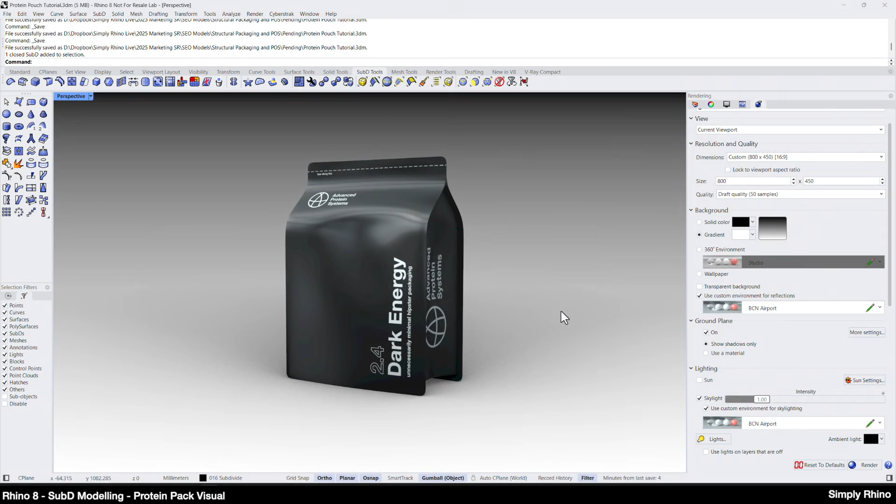Back in the rendered viewport, I can make some changes to the reflective environment and background, and then open up the material and move the metallic slider to the right, and also add a clear coat value to make the pack material more like a laminated or coated plastic sheet. At this stage, it's perhaps best to check the result in the ray traced viewport, as this will create physically correct reflections.

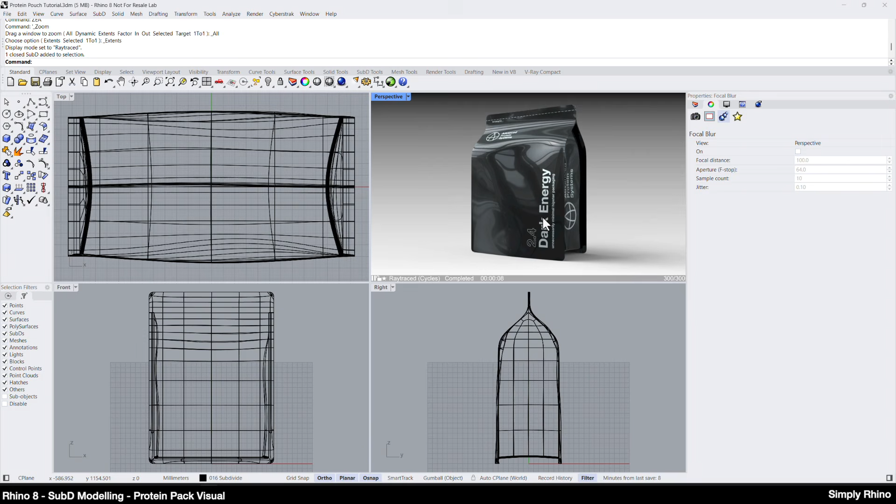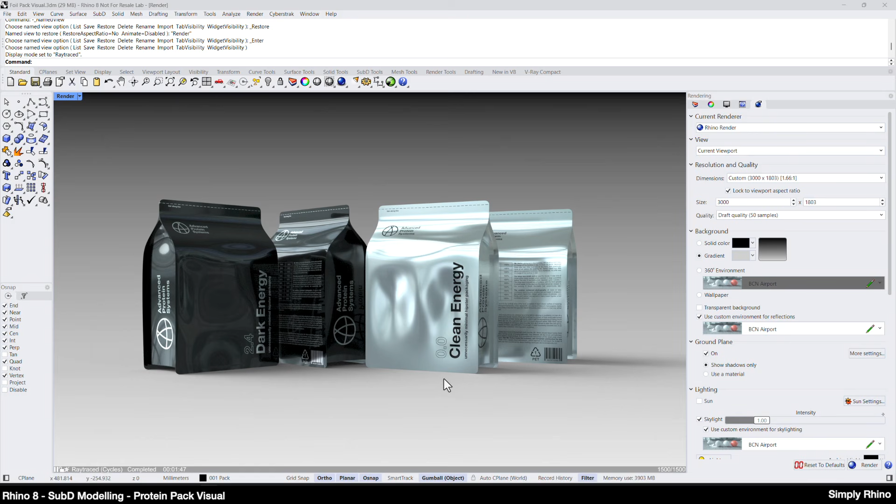For the composite view here, I've copied the pack into a new file and duplicated it across 3 new layers. The material and mapping will of course copy with the SubD geometry, and I can create the silver clean energy material by simply duplicating the dark energy material and swapping out the bitmap texture. It's likely that the metallic and reflective values will need to be reduced on the silver pack to prevent the highlights from blowing out. I can then render the image to the appropriate size.

I'll choose the EXR format if I need a high bit depth image for adjusting in post, and finally there's a process that I can use which will make it easier to mask the packs in an image editor, allowing them to be edited independently of the background and each other.

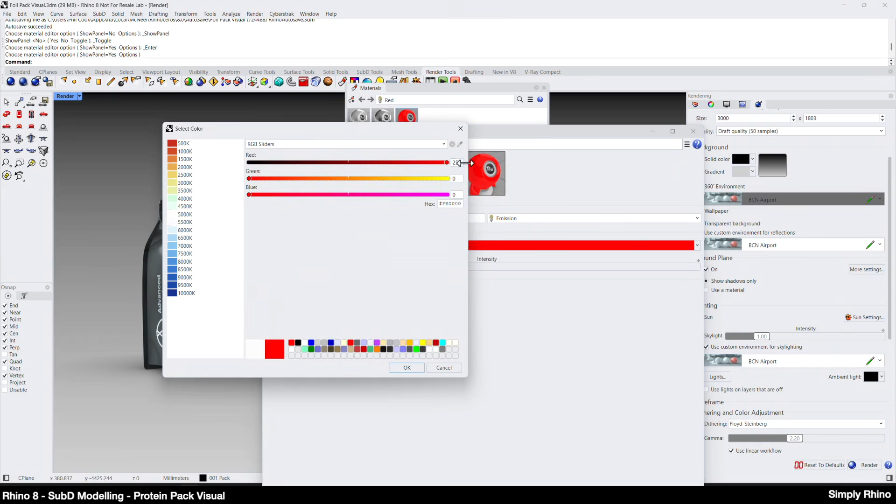Working on a copy of the file, I'll create 2 new emissive materials, one of which will be 100% red, so in RGB terms 255, 0, 0, and the other 100% blue, so 0, 0, 255, and then replace the Dark Energy material with the red emissive and the clear energy material with blue emissive.

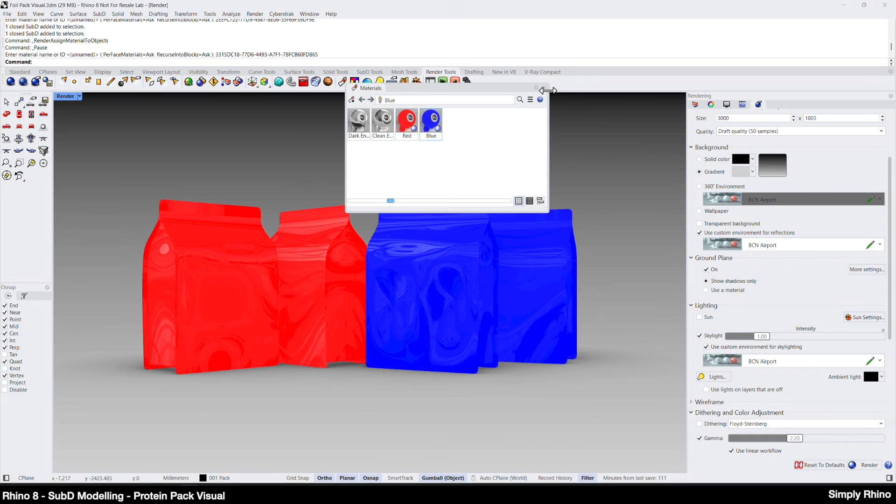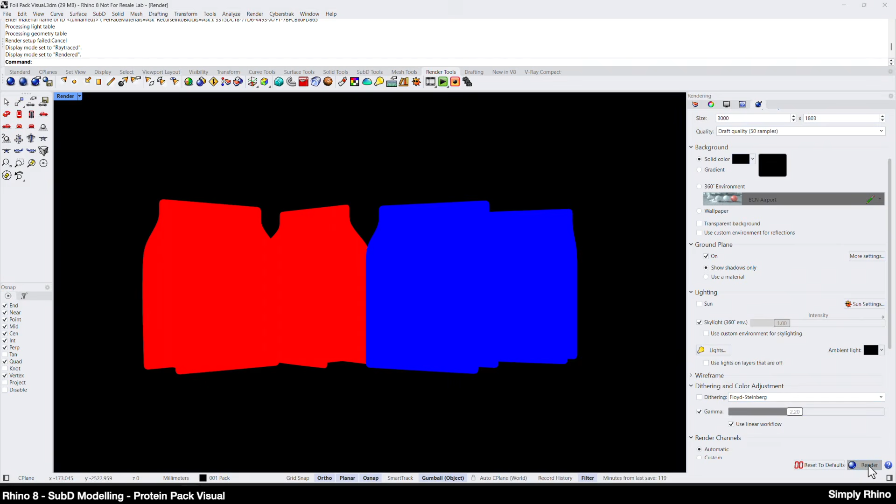Then in the rendering tab, I'll set the background to black and uncheck Use Custom Environment for Reflections, which effectively turns off the reflections. I'll then uncheck Use Custom Environment for Skylighting. I'll now have an effectively unlit scene with 2 emissive materials that will render out as flat red, blue and black masks.

If I then bring this into an image editor as a separate layer, I can use this to create simple selections using the magic wand or equivalent, which allow me to adjust, for example, the exposure, highlights, shadows and saturation of just the selected packs without affecting the rest of the image. So that's about all I wanted to cover in this video.